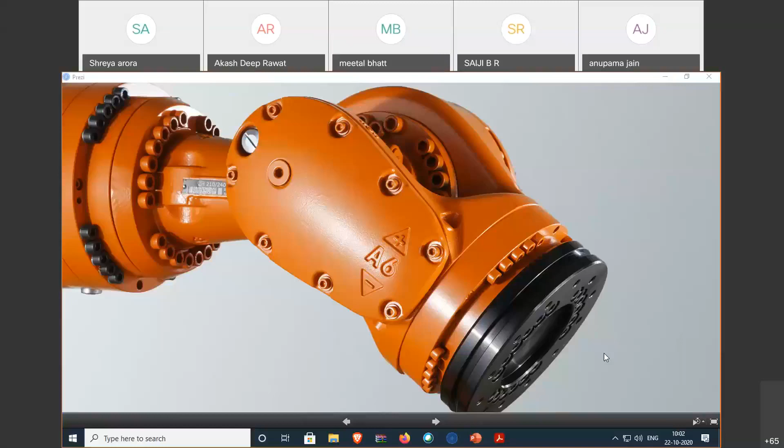He has worked on various industrial projects and research work, and has been an actively participating member of NBA, NAC, UGC, and AICTE visits.

His main highlights include working with DRDO, the Center for Artificial Intelligence and Robotics, Defense Research and Development Organization, as an external expert member under the Ministry of Defense, Government of India project, the SIQ project.

He has 67 international peer-reviewed journal papers, including 24 SCI papers and 43 Scopus and SCIE papers. He also has 53 national peer-reviewed papers to his credit.

He has a total of 120 papers published in high impact journals, both international and national.

He has provided PhD guidance to 3 students at present, and has guided 31 MTech students, with this work still ongoing.

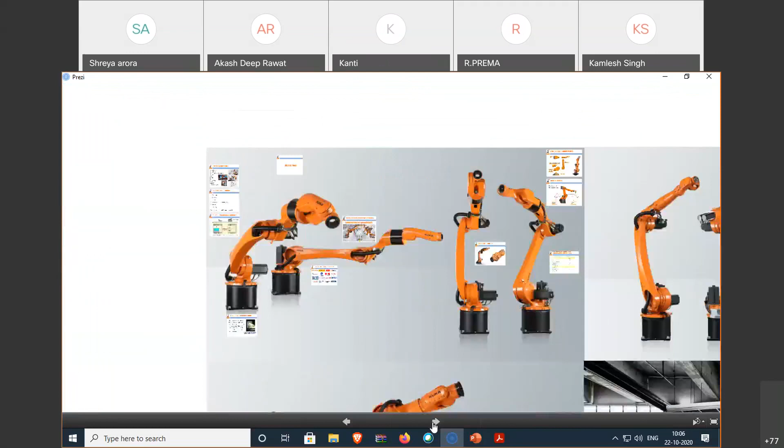So this is my core content - 50% is based on the presentation, and 50% is based on practical exposure in different simulators and tools.

So the first slide is on robotics - industrial robotics, as an introductory part. It is a multidisciplinary system engineering related field, relevant from class 6 to class 10 plus 2 standard and beyond.

We have realized that there is a wide gap between academics and the expectations of modern industry from passing out students. Ever-changing and ever-evolving technology is virtually transforming every aspect of human existence.

This change is constantly creating a need for skilled engineers, managers, and technocrats. India is rapidly adopting robotics in industrial production.

Robotics is a high-end technology stream witnessing rapid development and is being deployed extensively in industrial production, creating large employment potential for robotics-trained and certified engineers.

An industrial robot is a robot system used for manufacturing, especially for different assembly purposes and segments. The most commonly used robot configurations are the articulated robot and the SCARA robot.

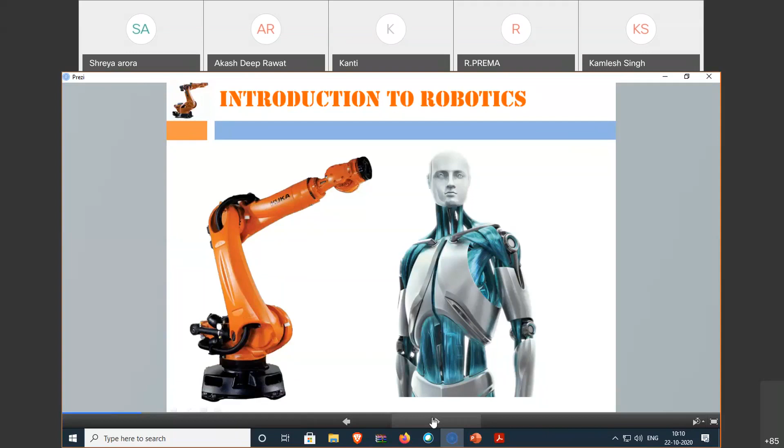Now the types of industrial robots. This is a simple example of industrial robots, categorized into different types. There are 5 different categories of industrial robots: Cartesian, cylindrical, spherical, SCARA, and the last and most advanced is the articulated robot. We'll discuss these in simulation mode.

This is a simple example, as I already discussed, of an industrial robot. So an industrial robot is an automatically controlled, reprogrammable and multi-purpose manipulator programmable in 3 or more axes, with a maximum of 7 or 8 axes. Industrial robots are much more flexible as to the orientation of the object on which they are operating, or even the task performed on the object itself.

As the robot may even need to identify objects, for example for more precise guidance, robots often contain a machine vision system acting as their visual sensors, linked to powerful computers or controllers. Artificial intelligence and machine learning is becoming an increasingly important factor in the modern industrial robot.

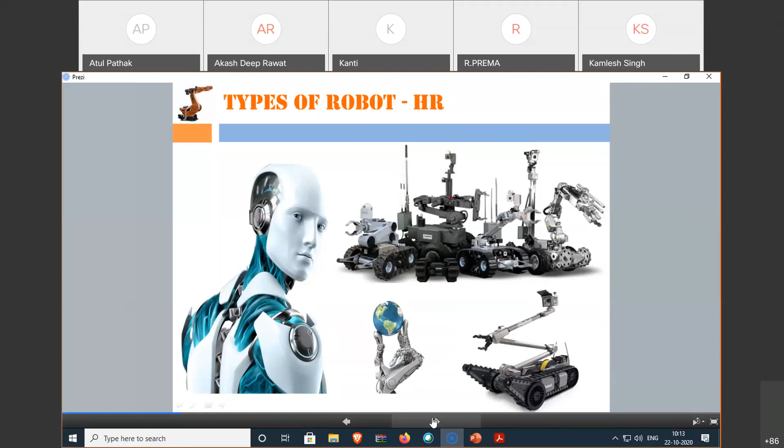The first industrial robot: Unimate was the first industrial robot, which worked on a General Motors assembly line at the Inland Fisher Guide plant in Ewing Township, New Jersey. It was invented by George Devol in 1954. In 1960, Devol personally sold the first Unimate robot, which was shipped in 1961 to General Motors.

Unimation was the world's first robotics company, founded in 1962 by Joseph F. Engelberger and George Devol. It was located in Danbury, USA. So this is our first industrial robot.

The first 6-axis industrial robot: PUMA was the first 6-axis industrial robot worldwide. PUMA stands for Programmable Universal Machine for Assembly, or alternatively Programmable Universal Manipulation Arm. Both names are correct. It was developed by Victor Scheinman at Unimation in 1978, initially developed for General Motors.

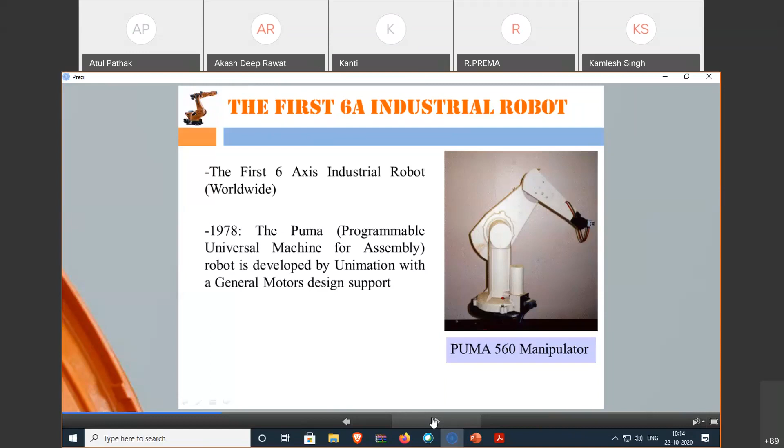This is a real industrial robot. Before I start this slide, I'll pose one question, since this session will be interactive. My question for everyone is: a robot is... what is the correct answer?

So we'll start and continue. If I'm talking about the real industrial robot, in this slide there are three most important parts of the real industrial robot. First is the robotic arm or robotic manipulator. Second is the industrial controller. And third is the KCP or HMI. We will discuss all these parts in detail in the next slide.

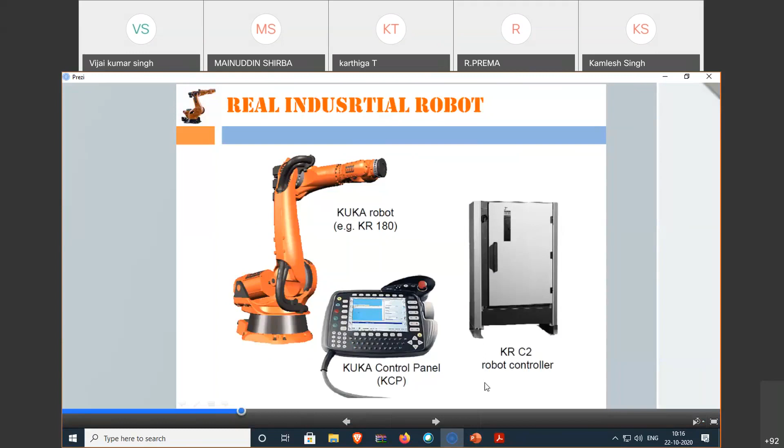Six-axis industrial robot, also called industrial robot, industrial manipulator, or industrial robotic arm. Different industrial robot manufacturers offer a comprehensive range of industrial robots, starting from 3 kg to 1300 kg payloads. Industrial robots come with powerful control technologies, so you can operate your robot and production system simply and efficiently. As per the figure, the first 3 axes are primary axis and the last 3 axes are the secondary axis.

Industrial robot parts: the arm can vary in size and shape. The industrial robot's arm is the part that positions the end effector. Industrial robot body structured parts are the base frame, rotating column, link arm, and wrist. And here you will see the counterbalancing system.

The counterbalancing system basically maintains the CG of the robot. Counterbalancing is a weight or force that balances or offsets another, when two objects of equal weight, power, or influence are acting opposing to each other. This device is controlled by an automatic process with the help of AI and ML, meaning artificial intelligence and machine learning.

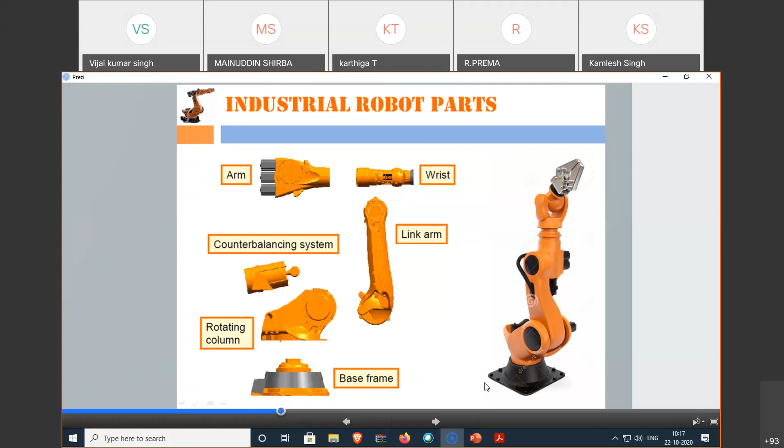This is the advanced robot controller, the industrial controller generation 4. This industrial robot controller is basically the brain of the industrial robotic arm and allows the parts of the robot to operate together. It works as a computer and allows the robot to also be connected to other systems.

The robotic arm controller runs as a set of instructions written in code, called a program. This program is input with the teach pendant, or HMI, or KCP. Many of today's industrial robotic arms use an interface resembling or built on the Windows operating system.

The industrial robot control system emphasizes being more powerful, more intelligent, safer, and more flexible than previous models. It is basically the 4th generation industrial controller, so it is very safe and very accurate. It emphasizes safety and functionality with the integration of the safety control system.

Additionally, there is a huge cost reduction for the integration, maintenance, and servicing of the industrial control, because this is very advanced. Communication modes available in the 4th generation control include power pack, servo, electronic measuring device, and communication control units. This is also supported with artificial intelligence and machine learning technology.

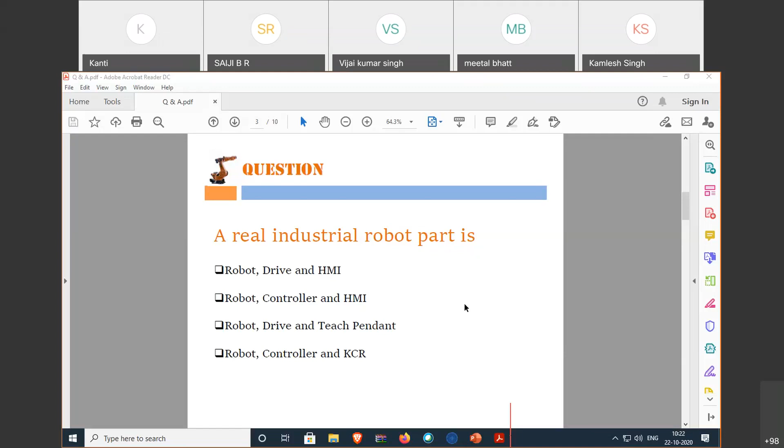So the option is C. Okay, so the correct answer is B. B is the correct answer because the 3 most important parts are the robot or industrial manipulator or industrial arm, second is the controller because the controller is the brain, and third is the HMI, human machine interface, or KCP or teach pendant. So answer B is correct. Drive is basically related to motion control, like a servo drive and so on. So the correct answer is B. Thank you.

HMI is very easy to use and user friendly because it is very advanced, basically a smart pad. This HMI is a 4th generation HMI, just like your touch phone. Maximum industrial robot manufacturers offer a fresh approach to robotic teach pendant technology. A number of hardware and software enhancements make the product unique. Robot operators will appreciate the smart pad's ergonomic, colorful, and highly interactive design.

Plus, the smart pad is not heavy, its weight is just 900 grams to 1100 grams. Commands are easily inputted using multifunctional keys, a 6D mouse, and the anti-reflection touch screen. Industrial robot manufacturers had designed the smart pad with more flexibility, allowing keys and a graphical interface to work to multiple content-driven modes.

A hot plug feature allows the smart pad to be detached from the running robot and system which is not in use. This capability increases overall safety and makes it possible to use the same pendant for multiple work cells. Other hardware features include an integrated USB 2.0 or 3.0 and 2 additional access switches to activate 2 additional 8 axis or 7 axis which can be controlled through keys. So this is a very advanced HMI that interacts between a human and machine, or human and robotic arm or controller.

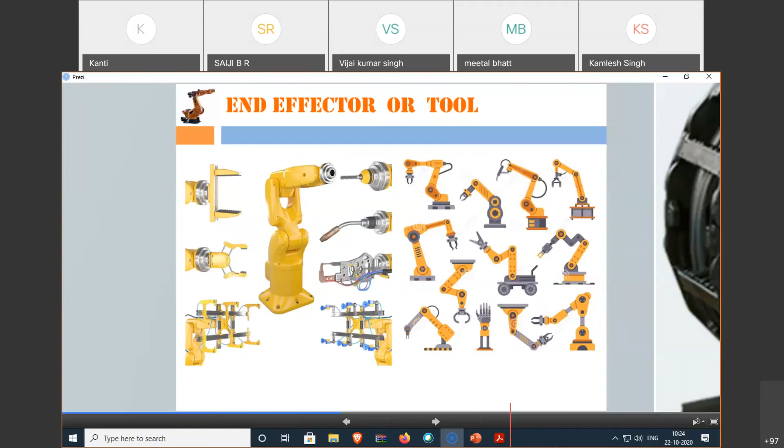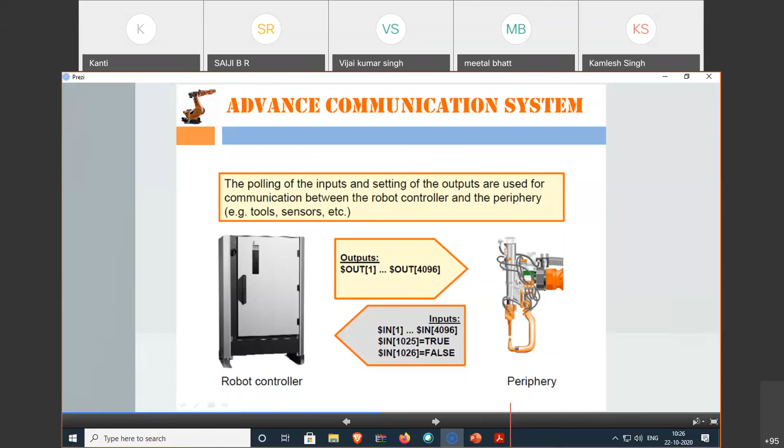Advanced communication system: as you know, it's a 4th generation industrial controller, and this system is more powerful and more intelligent. It is also controlled by artificial intelligence and machine learning. In the 4th generation controller, we can connect a maximum of 4096 inputs and 4096 outputs, meaning at a time we can connect and control a maximum of 4096 peripherals like tools, sensors, communicators, etc.

Advanced feedback and accuracy: the advanced C4 controller feedback integrates complete robot motion, sequence, process, and safety control. It seamlessly incorporates the complete safety controller into the control system. Its multi-core technology enables dual channel operations required for safety applications, such as welding channel operations and milling channel operations.

Feedback functions and feedback-oriented communication are implemented on the basis of Ethernet and VxWorks protocol. VxWorks is basically an RTOS, a real-time operating system, and it is very advanced for high-tech communication in real-time database management. Feedback system and accuracy protocol in VxWorks is very high, and safety and sensitivity are in current market demand. So this operating system will maybe be in high demand for the next decade.

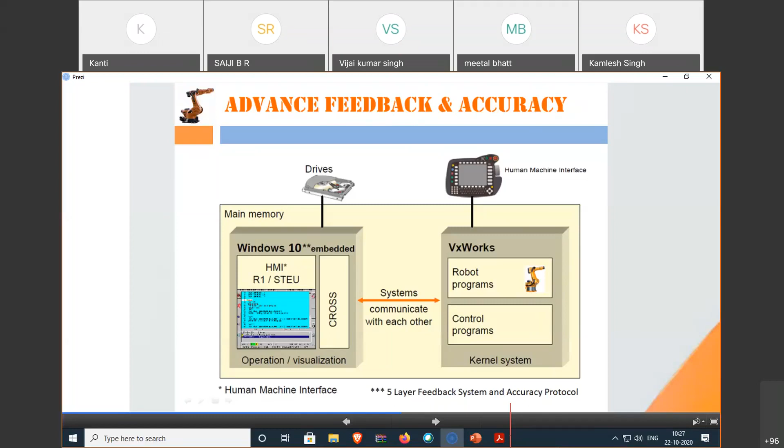Advanced feedback and accuracy: basically this feedback system has an inbuilt 5-layer feedback system and accuracy protocol. Here we use a 5-layer closed loop control system, and closed loop control systems are designed to automatically achieve and maintain the desired output condition by comparing it to the actual condition.

User group: this basically defines the cadre of the industrial robot programmer. The industrial robot user group contains all the basic, advanced, and expert functions such as path planning, input and output management, programming, controllability, and observability. The basic and starting group is the user group, which is designed for operators. An operator can set up and operate the industrial robot.

Next group is the expert group. This group is especially designed for the robot programmer. A robot programmer can provide the technical expertise required for the integration, programming, assistance, and service of the robotics application.

And the last is the administrator group. Most of us know what an administrator profile is, as well as a general user profile, when it comes to our PC.

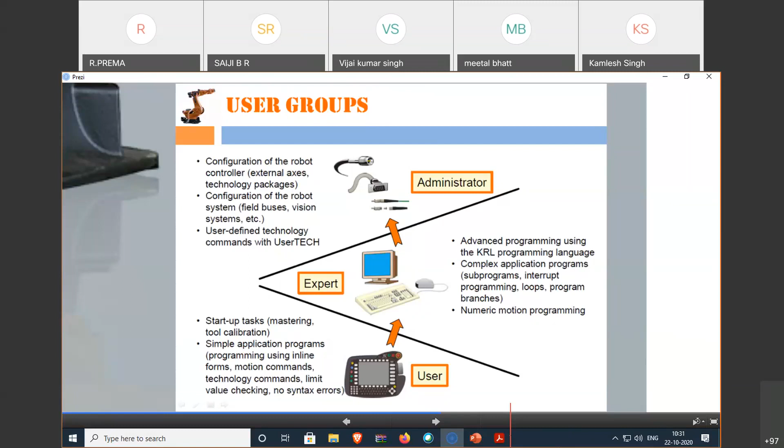Before I start this slide, here's a question: what is CCU? Any idea?

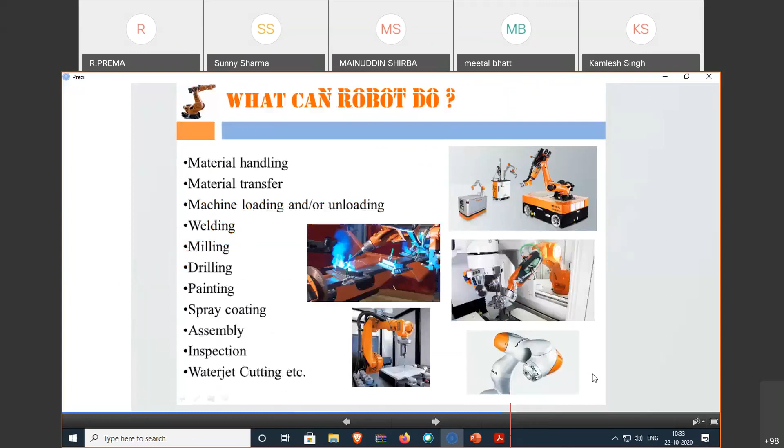What can a robot do? This classification is based on application. As more and more robots are designed for a specific task, this method of classification becomes more relevant. For example, many robots are designed for assembly work, which may not be readily adapted for other applications, and they become known as assembly robots.

One especially dedicated robot is designed and developed for SCARA - Selective Compliance Assembly Robotic Arm. This robot is especially dedicated for assembly purposes only.

This application here is a welding process. I will give the detail in simulation.

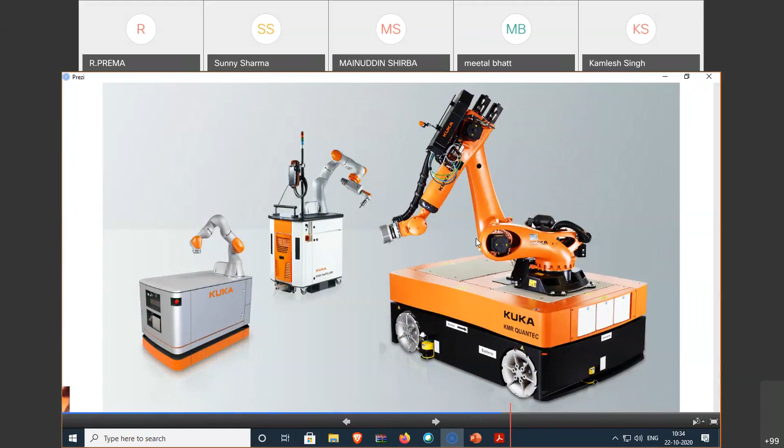Next, any idea what this is? A robot - an industrial robot? Yes, it's an industrial robot, but the whole system is one technical word. This platform - so it can be called a pick and place machine. It is pick and place. Yes, okay. Actually, this machine is AGV, automatic guided vehicle.

Automatic guided vehicle - I will show in video also. So this robot is basically an articulated robot, a 6-axis industrial manipulator. With the help of AGV, we can move in any direction - X, Y, and Z - for any type of application. Suppose we install a pick and place tool here, this robot becomes a pick and place robot. Suppose we install a welding tool, this robot becomes a welding robot. Depending on the tool, application, or requirement, the robot will operate different types of processes. This is basically a very advanced machine - an AGV, automatic guided vehicle, without any human support.

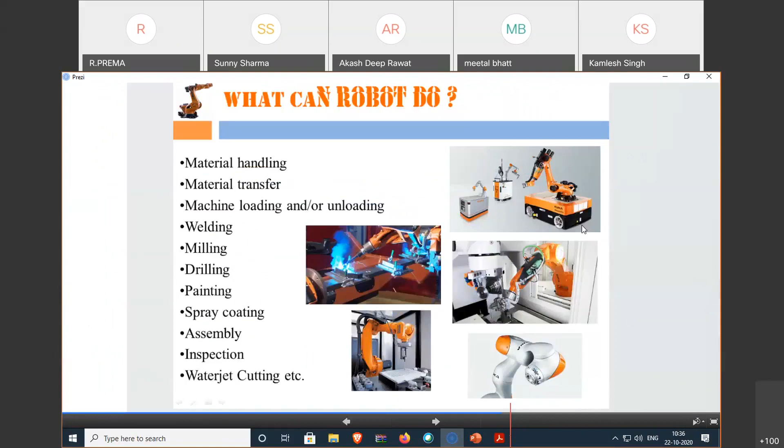And next, this simple drilling process. This is MAPS - Modular Automation Production System. This basically supports advanced automation work, in terms of CNC support, DMC support, AMC support. This type of support is basically the cadre of industrial robot called MAPS robot or MAPS automation.

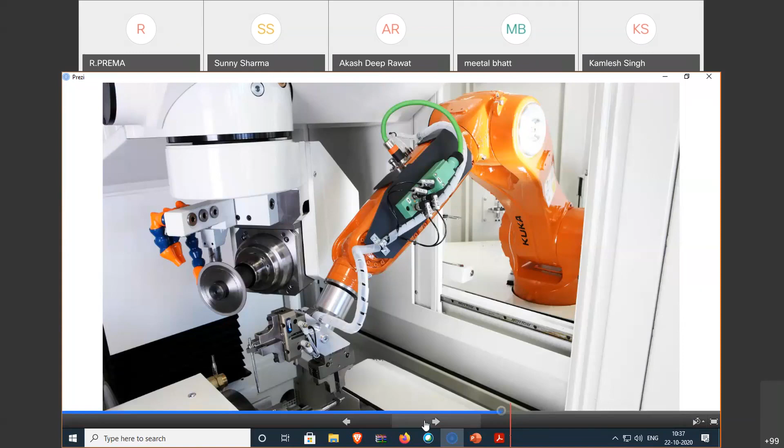And this is a medical operated robot, or medical research robot.

Next are the advantages of the industrial robot. These are very common advantages, and you are also well aware: high production requirement, reduced lead time, setup time elimination, better quality with lower price, safety in operations, shifting of manpower to the service sector, reduced rework processes, and competitive production.

And these are the disadvantages of the industrial robot. System changes are difficult and slow to implement. High cost and long-term payback, because the industrial robot cost is very high and automation cost is also very high.

And the next is unemployment - this is the most important part. If you're talking about unemployment, there are 4 different categories in the market: unskilled, semi-skilled, skilled, and highly skilled. I strongly mention here, if you are in an unskilled or semi-skilled cadre, immediately change your cadre to skilled technocrat, otherwise your smile may turn into a dangerous unemployment situation.

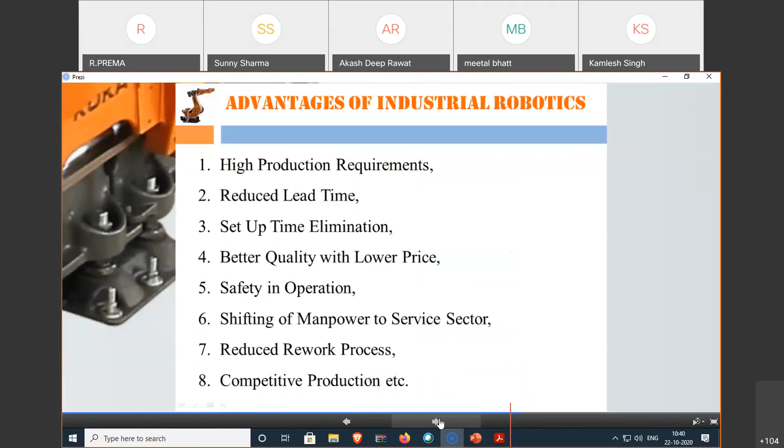So I think, is it clear? Is this slide clear? Yes, sir, clear.

I forget the full form, actually. SCARA productivity is 2.7% and other is 11.1%.

Next is the distribution of the world robot population, January 2020. In terms of ranking, Japan is number 1 at 44.1%, USA is 22.1%, and Germany is 8.8%.

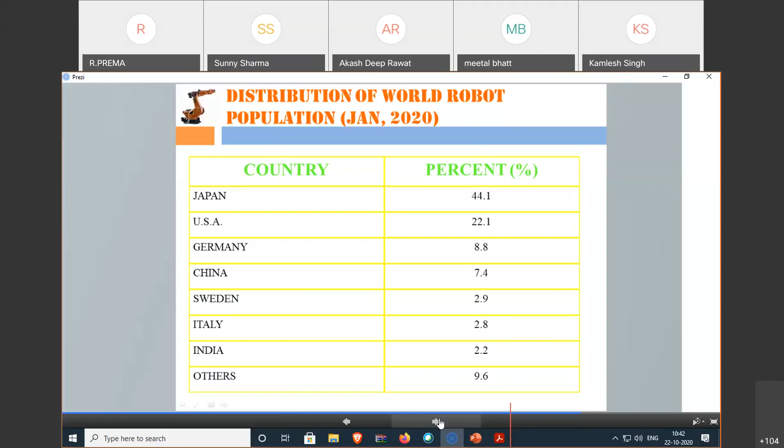India, if I'm talking about India, is 2.2%. So maybe some improvements are required for India, and others make up 9.6%.

So, business and job opportunities. As you know, industrial robot is a multidisciplinary system engineering related to different branches. So we need engineers, technocrats in different segments like electronics and communication, computer science, information technology, electronics and communications, and other special branches.

The revolution will create exciting career opportunities in different industries like manufacturing, petroleum, oil and gas, building material, construction, consumer durables, and many more, including telecommunication, computer hardware and software industries.

So pay structure of the robotic programmer, and this data is taken from authenticated sites. This pay structure data is basically taken from the official websites of Maruti Suzuki India, Hyundai Motors, Honda Car India, Volkswagen, General Motors, Tesla Motor USA, Volkswagen Motor USA, and BMW USA.

In India, basic robot programming pay is from 4 to 8 lakhs, advanced level 7 to 16, and expert is 19 to infinite. Infinite means it depends upon industry needs or requirements, your experience, knowledge, and multitasking ability - totally dependent on the situation. It's similar in the USA. So if I'm talking about a career in robotics, it's definitely bright.

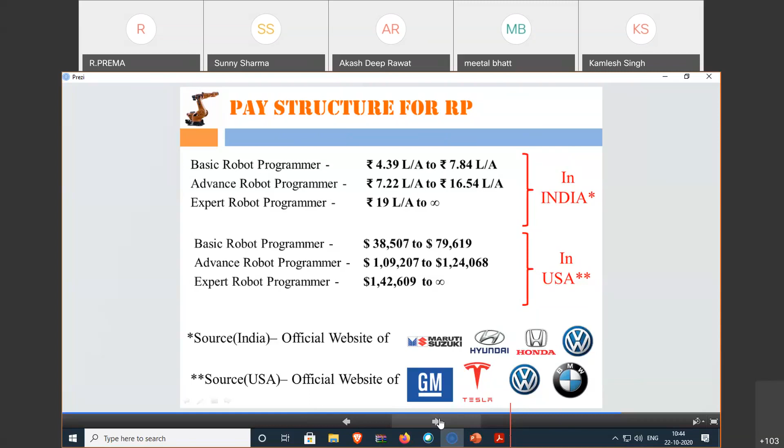The major robotic companies in India: KUKA, Fanuc - KUKA has basically been the number 1 company worldwide for the last 3 years. Then Fanuc, ABB, Mitsubishi Electric, Stäubli, Comau, Kawasaki, Denso, Yaskawa, Yamaha, Omron, Nachi, Epson, etc.

And these are the major automation companies in India, like Maruti Suzuki, Hyundai, Isuzu - these are the top major automation companies.

And the conclusion. I already talked in this presentation about the way of future computing, automation, digital robotics, business and academia, and daily life for everyone. Purpose of the talk is to make people appreciate how the process of automation and robotic computation has become an essential part of everything that we use and depend on 24/7 all over the world.

In terms of industrial automation robotics, Sir Stephen Hawking was at a Reddit session in October 2015. He advised that in the next decade overall robots will replace humans, and the future trend in industrial automation robotics is that overall robots will replace humans in the next decade, or maybe 10 to 15 years.

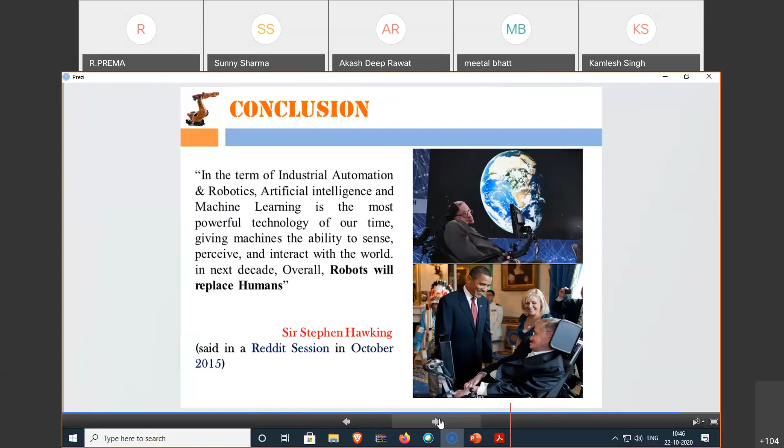So thank you. Now for the questions. Next question: maximum number of inputs and outputs is... 1026? 4096.

Option D. Right answer is Option D, sir. The maximum number of inputs and maximum number of outputs in terms of external or internal input generation for a robot controller.

The maximum number of inputs and outputs for the robot controller is 4096.

And the next and last question is: SCADA is Option A.

Supervisory control and data acquisition. Option D. I think option A. Are you sure? Option C. Control and data security. The correct answer is supervisory control and data acquisition. Option C is the correct answer.

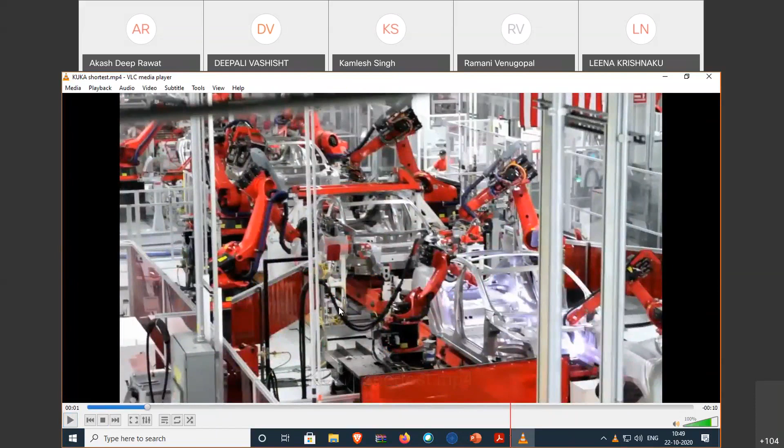The robot's maximum speed is 2 meters per second. This plant is completely automatic, and I think he used the robotic software version VxWorks 4.8.2.

Sir, please repeat the video, sir.

This is a Volkswagen car plant video. So please, see here.

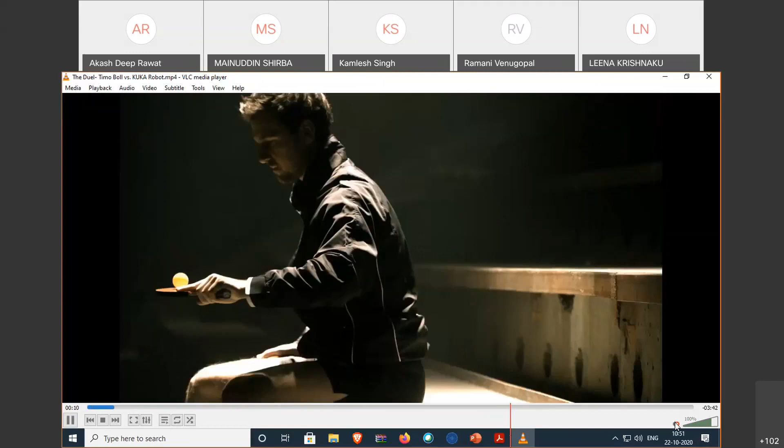This war is human versus machine.

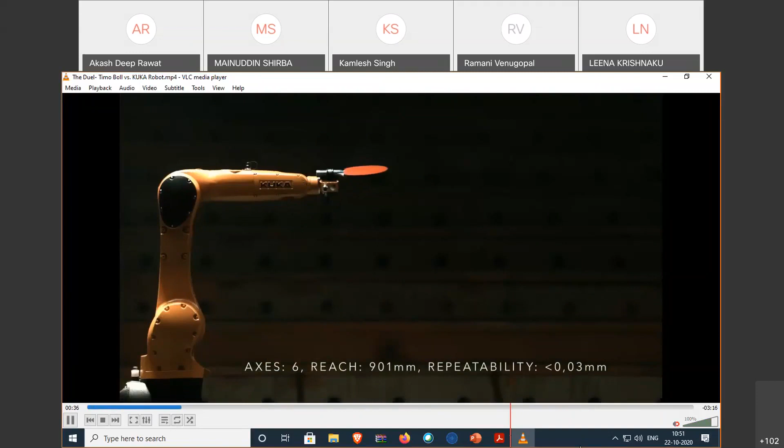This robot is a KUKA KR AGILUS, and this is a 6-axis industrial manipulator with the support of a real-time operating system. Its controller is a 4th generation controller, KRC4.

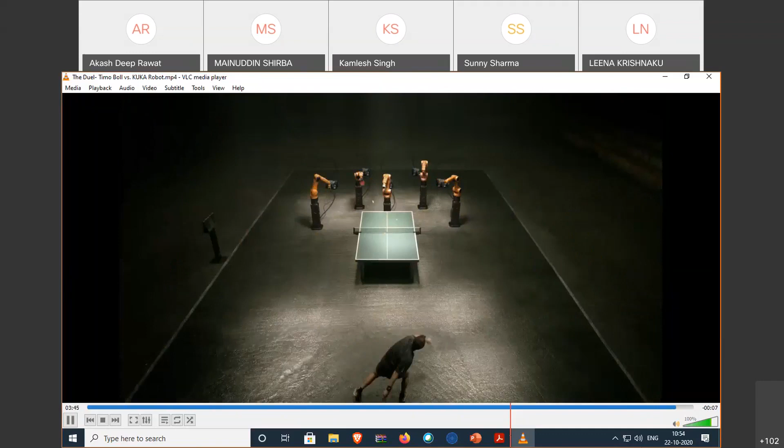This is a simple example of AI and machine learning.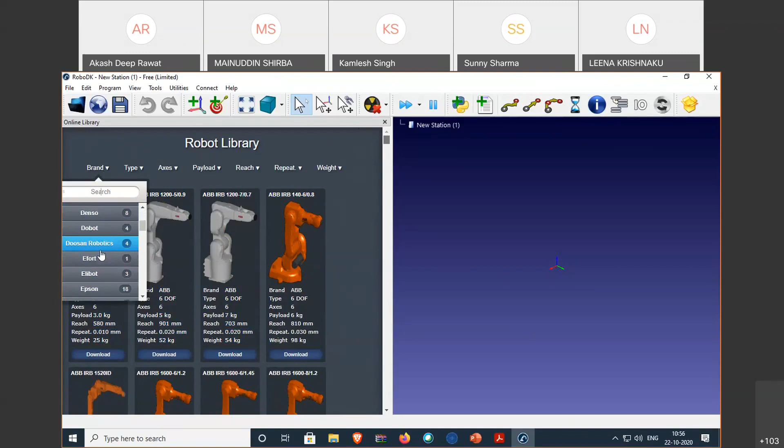So suppose we choose a KUKA. So this is the KUKA robot. Suppose we download a 6-axis or 16 kg payload robot.

This robot is an industrial carrier robot, and it is a 6-axis industrial robot. I already discussed there are 5 different categories: Cartesian robot, cylindrical, spherical, SCARA, and the most demanded and high accuracy based one, the articulated robot. So this robot is articulated based.

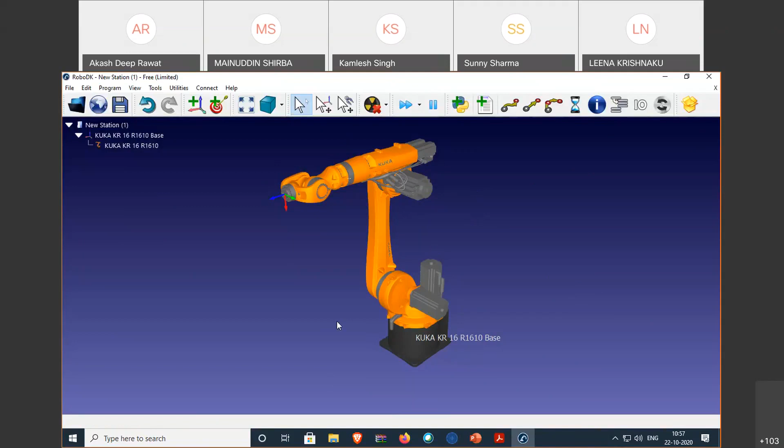So I will show the movement. When I click this robot, this window will open, and there are basically 2 different types of motion movement: one is translation movement and second is rotation movement. So what is the effect, what is the difference? I will show you here.

When I select translation in the X direction, no movement is visible here. But with rotation, movement is visible.

So translation movement is basically movement from one destination to another in an axis-specific movement. Suppose we have a 5-axis or 6-axis industrial manipulator, and we move in translation movement according to the X, Y, or Z axis. If we choose translation motion, we move different types of axis, or axis-specific movement.

Suppose we choose the Z axis in rotational form. So this is the motion of the A6 axis.

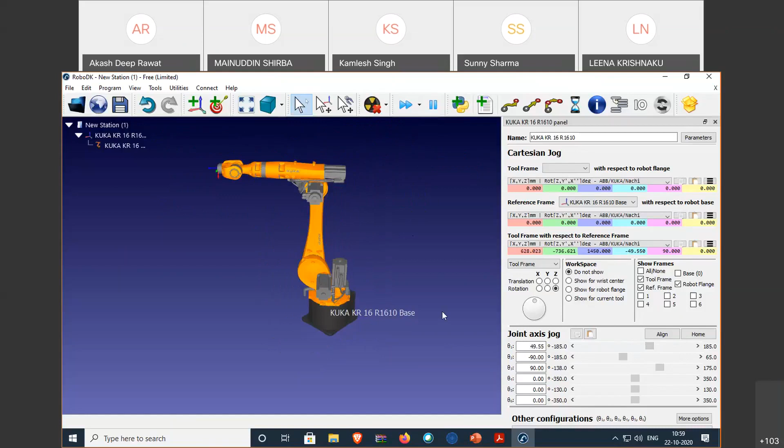So this is axis A1. This means if I move the axis-specific movement, then only the dedicated axis moves. So this is axis 1, and this is its movement, from minus 185 degrees to plus 185 degrees. Got it?

Second, A2. A2 is minus 185 to plus 65 degrees. So the second axis is here, this portion. The first axis is here, the second axis is here, from minus 185 to plus 65.

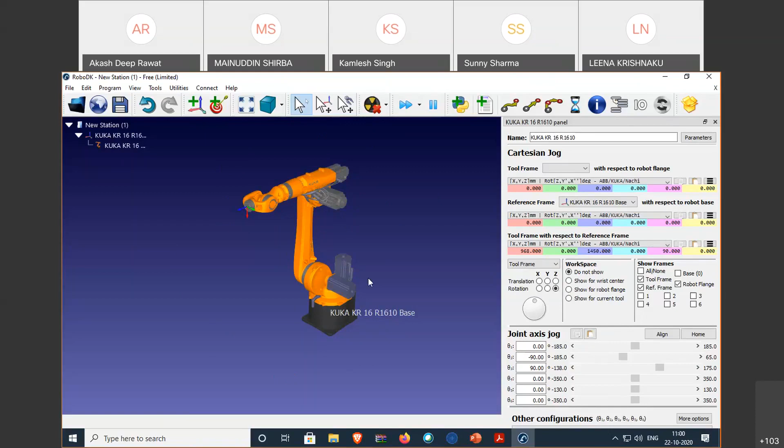The third axis is here. This is the third axis because the first three axes are the primary axis: first, second and third. These first three axes are the main axis, and the last three axes are the secondary axis. This third axis ranges from minus 138 to plus 175 degrees.

The fourth axis, let me show you. Is it visible?

Hello, is it visible? Yes, sir. Yes, sir, it is.

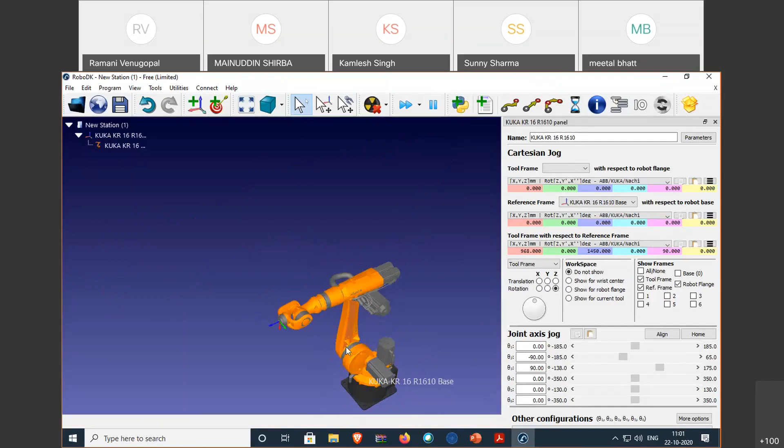Axis 4 is minus 350 degree to plus 350 degree, and axis 4 is this orbit. This black O-ring is called, in technical terms in robotics, orbit. This is A4 orbit. This is A1 orbit, A2 orbit, A3 orbit, A4 orbit, A5 orbit, and this is A6 orbit.

Okay, so I'll move the fourth axis. So this is the fourth axis, and this range is from minus 350 degree to plus 350 degree.

So sir, can you please define the orbit? Orbit is basically the axis movement. Here is specified the servo drive, here a servo drive is mounted.

The servo drive is connected with one communication control channel, and this communication control channel is coordinated with one O-ring cycle implementer. Actually, the hardware name is cycle instrumenter, and this is called the orbit. And this axis is basically placed on this orbit, this black color O-ring. Got it?

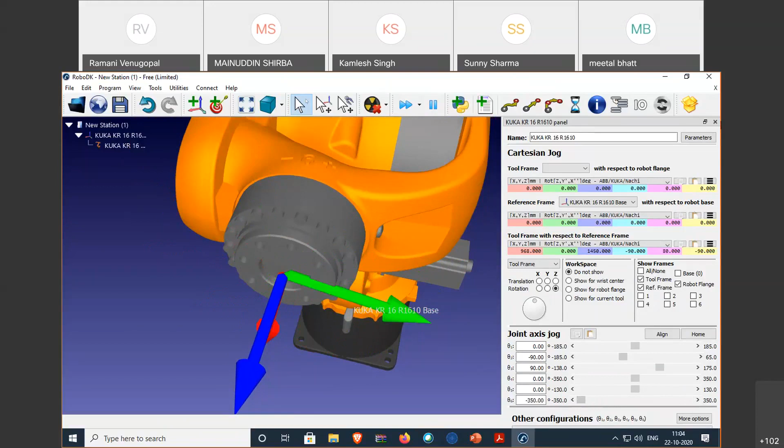So I installed one tool. Already installed different types of tools. Suppose I installed one welding gun, open, and this is basically installed on A6 axis. So this portion is the end effector of the robot.

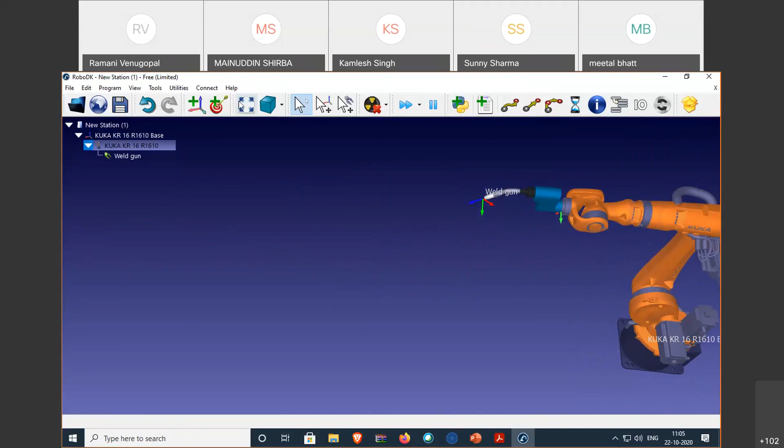So from A1 to A6 are different types of axis. A1 axis, A2 axis, A3, A4, A5, and A6 is the end effector of the robot.

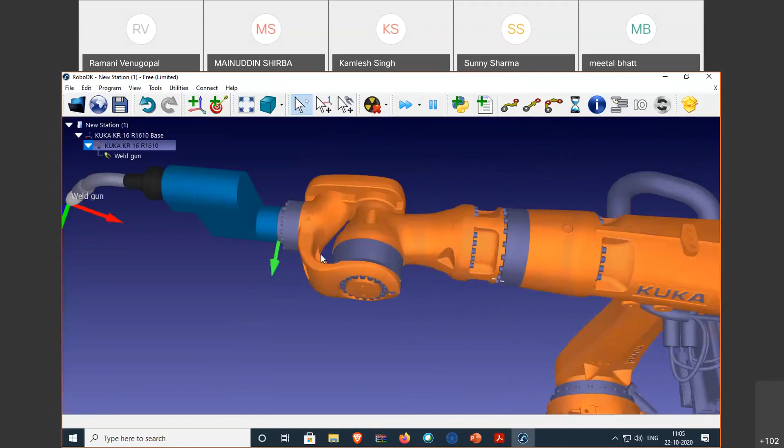So when I add any tool or any machine process operation instruments, or any type of third party hardware, it will be integrated with this A6 axis. And this is basically integrated with hardware, also software.

So this is basically a welding gun, and this welding gun is implemented with the robotic system channel. So if I move this axis, this is basically robotic welding, an industrial robotic welding manipulator. So when I click on robot and move axis A1, it moves with the tool.

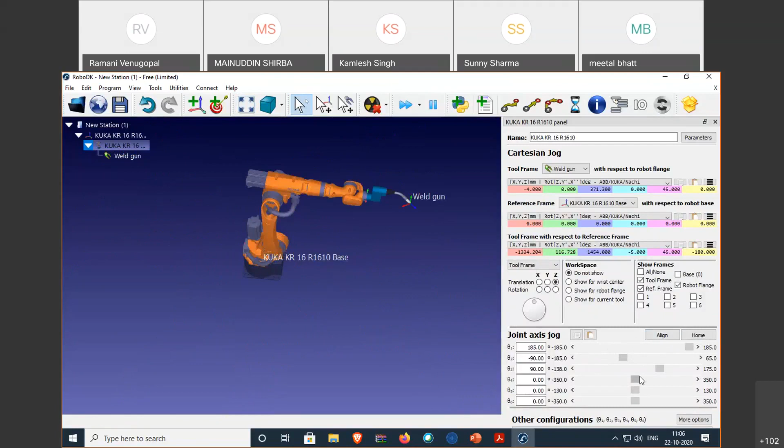Clear? Then I will show you one small process. Suppose we use any robotic painting. Yes? Yes ma'am? Any question?

So this is basically a robot, and this tool is basically a paint gun. Then this robot is called a paint gun robot. And this is the object.

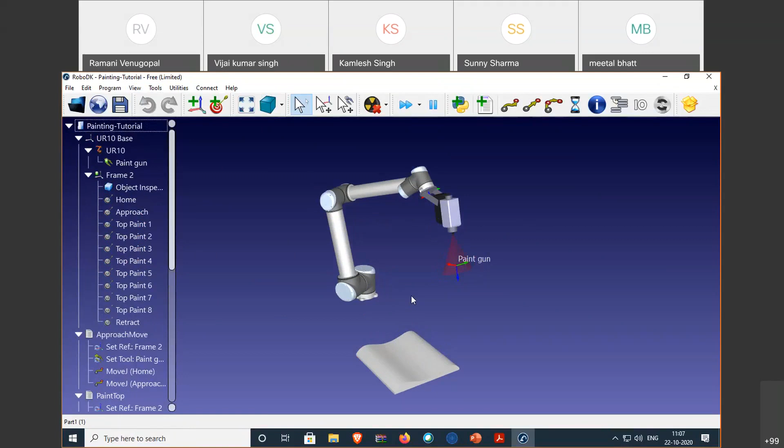Can we download this? Yes sir, can we download this program? Yes sir, you can download the program. You can download a robot, you can download a tool via this online library.

Suppose you can integrate any industrial robot with the industrial controller and support different types of applications, welding gun, milling, drilling, circle finishing, any type of tool. So you can download online, sir.

So this online download portal is here. If you click here, this is basically the online robot library. So this thing here, this robot, actually sir, RoboDK software is also downloadable.

Yes sir, it is free for 30 days only. You can purchase it for education purposes also, but this is especially free only for 30 days.

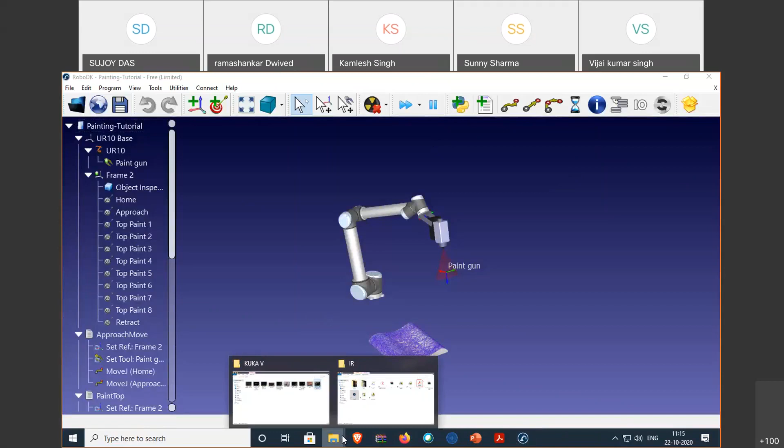Okay, and after that I will show you. I have created one small program. Just 1 minute, I will show you the basic code for the...

So any idea about C, C++ or Python? Yes, sir, yes, sir. We know C, C++ and Python.

So this programming is basically related to C++, but C and C++ is basically graphical based integration, along with C++, Python, and one database. You can use Oracle or SQL database with the help of VxWorks integration.

So this is a simple parameter, simple programming, and that programming methodology is RTOS. So this program is a critical systematic implementation, specially designed for artificial intelligence and machine learning based critical systematic implementation, and advanced brain routing and control for industrial robot controller KR C4. And this is a very basic program.

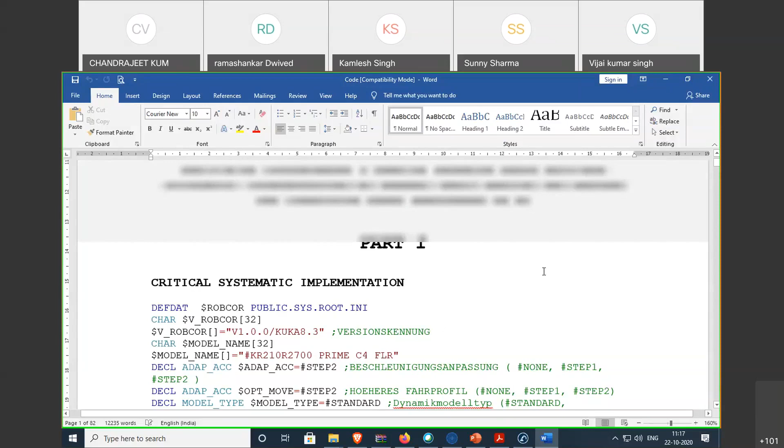So you're just aware of basic graphical coding related to C, C++, Python, and Java crypto languages. Okay, so just 1 minute. So this is a program.

Okay, please confirm me what is the output of this line.

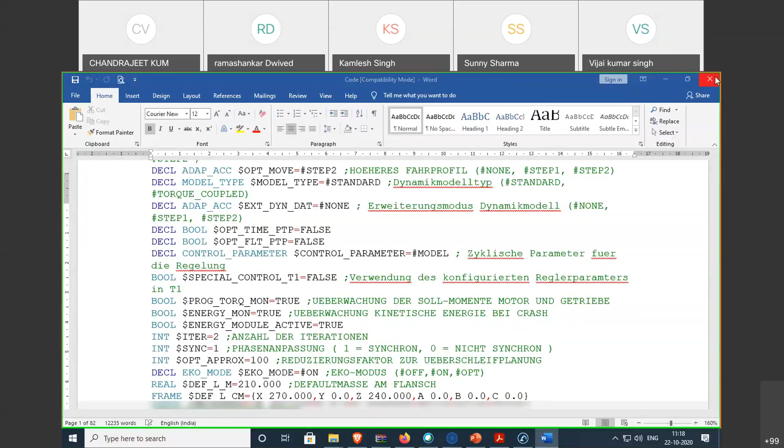Just 1 minute. Wait.

I will convert it into PDF form because there is some problem in my Microsoft Word.

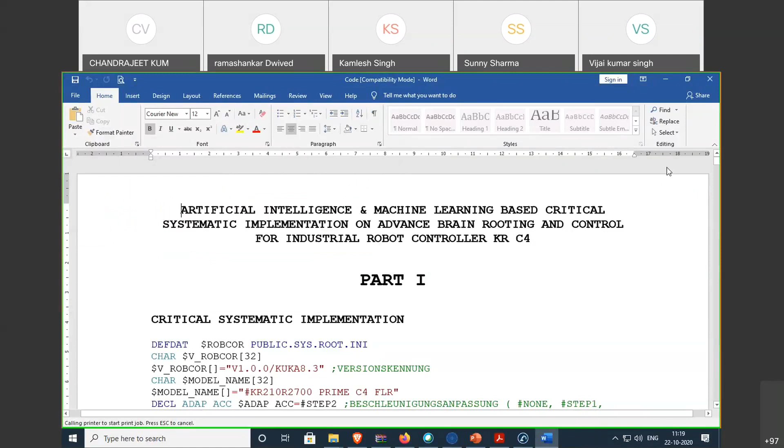Hello sir, I will open the PDF format.

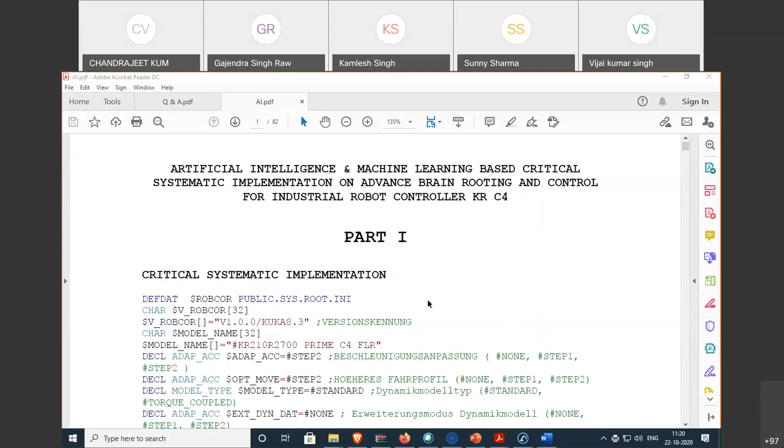So this is a code. Is it visible? Yes sir, so this is the basic implementation code based on the critical systematic implementation, and this program is with the help of C, C++, Python, I think 20 to 30% code in Java and SQL database. Okay, so just tell me what is the output of this line.

This line, call it this, from DEFDAT to this frame. What is the output?

You can take a screenshot and we will discuss after 10 to 15 minutes. I will move the presentation and simulation side. Okay, just please take this snapshot, I will discuss later.

So this is basically welding operations, and I can take one different example.

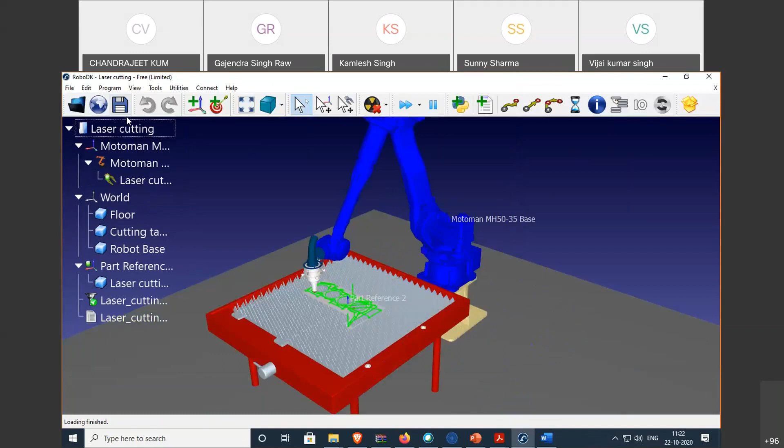So suppose we can take a laser cutting. So this is basically laser cutting operations. This is a laser cutting machine, and this is also integrated with the KRC4 controller with the support of Python.

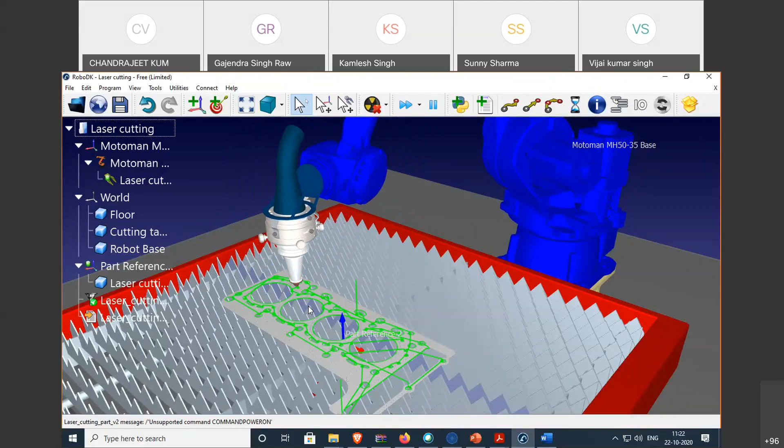So we integrate here this circle or any of the circle, similarly here, similarly here, similarly here. Okay, and this is basically integrated with AI and machine learning.

So before the programming, we integrate VxWorks, we integrate Python, we integrate one additional, SQL database, because database is the most important part of programming.

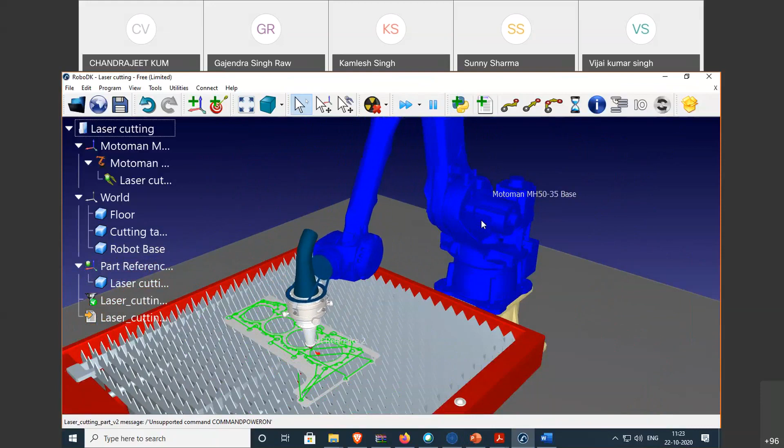So you can download SQL from the Microsoft side, or you can download Oracle from the Oracle side, and you can integrate directly with this Python. First integrate Python, then you can integrate with RoboDK.

Okay, this is the entire integration with the one root implemented. This is basically a basic input and output generation control system. So this operation is laser cutting. I will stop this operation and give you one different demo.

Next, I will show you a different operation. So this simulator name is RoboLogix. This is also free for some days. So I will show the arc welding.

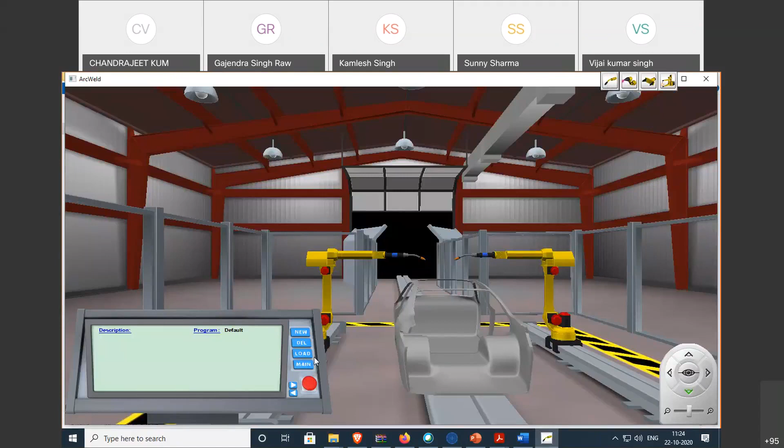So this is an arc welding operation here. This is a panel, this is basically HMI, this is a robot, and this is a controller. This is HMI, meaning human machine interface.

And we can program and create with the help of Python or any SQL database programming, or you can also program with the oriented software. I have loaded some examples, different types of programming. Suppose we can take one example, then we can load here.

Okay, and then we can run. So this is basically automatic operation.

So this is a BIW, body in white, and this is a car, any automotive car raw body.

This is arc welding. You can integrate with the motor also, this is basically servo motors. You can integrate different types of sensors, different types of actuators, different types of motion controller, and you can connect directly or indirectly with RoboDK, or connect with this arc welding software, with the help of any RTOS operation system.

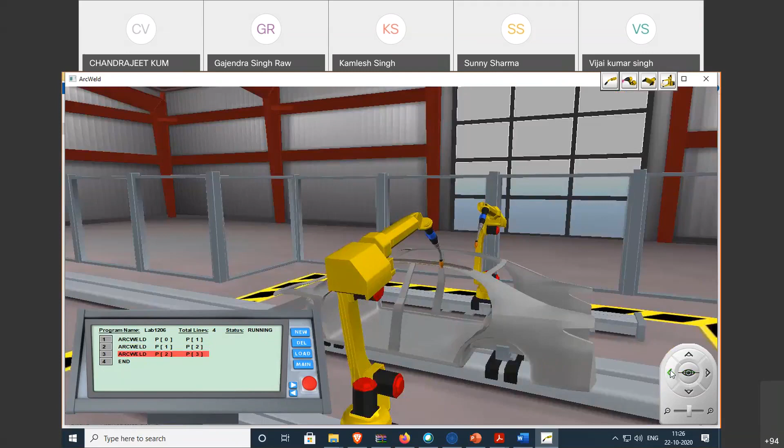Got it? Then painting. I will show you the painting operation.

So I can load any program. So this is a painting gun.

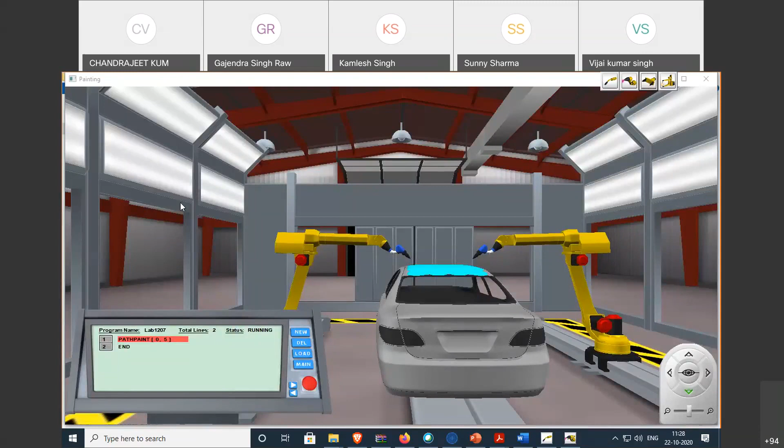Here we wait 20 seconds. Okay, so this is a pick and place operation.

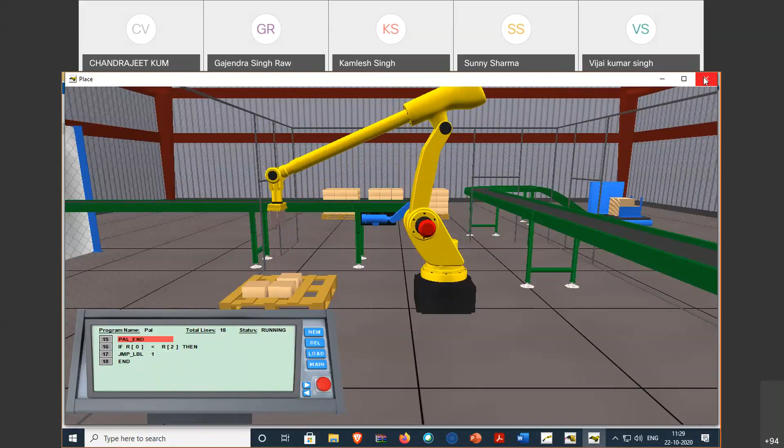And I will show you one interesting application, for both industrial and humanoid robotic operations. This is actually my favorite.

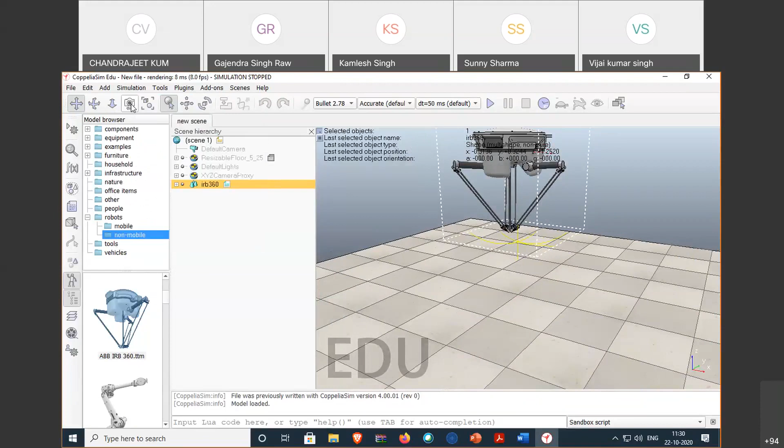So suppose we can choose non-mobile robots. These are different types of robots. Suppose we can choose this ABB robot, and suppose let's start the simulation.

Then this is basically the direction control mechanism, the X, Y, and Z direction control mechanism. You can create or manipulate different types of pick and place operations, any type of building operations, or any type of road system implementation operations.

And I will show you one mobile. So this is a humanoid robot. Suppose you can program a humanoid robot, you can also program with the motion control mechanism.

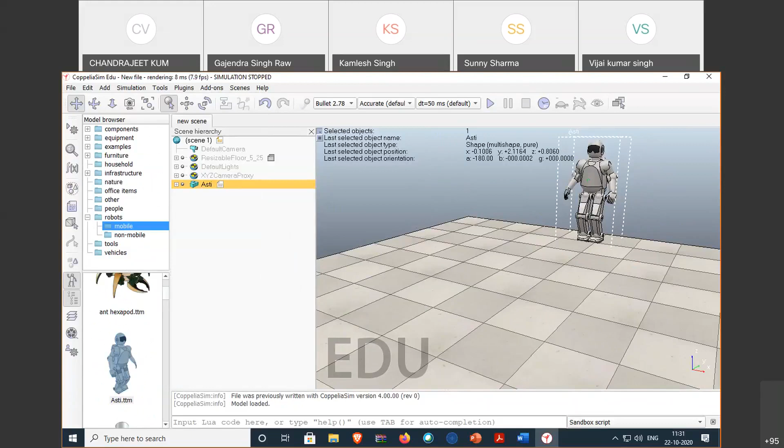So you can control here actually, so step size, if you increase step size, walking speed, this is a low walking speed and this is a high walking speed. Okay, so this is a drawback.

Excuse me, sir. Sir, can we generate C code, with this simulation, like Python or C code?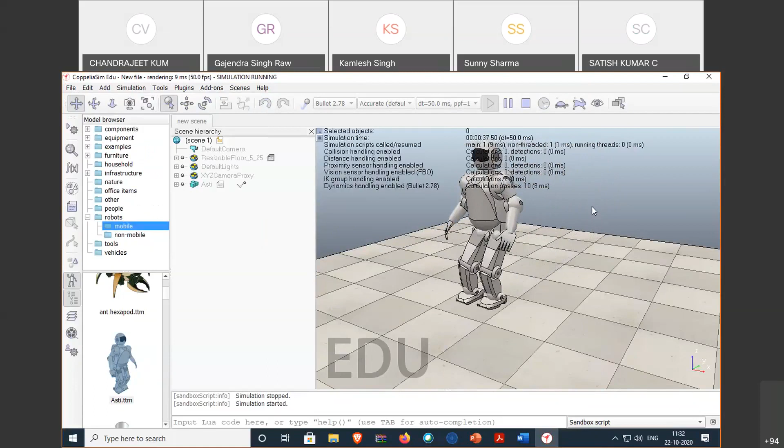Can't we generate in this tool only, sir? We have to inbuilt one more tool, sir. No, you can generate. Basically this is a robotic simulated software, so you can integrate any type of programming language. But the most capable and most demandable or preferable software is Python, with the support of a database. So you can convert, program, and integrate different types of software like C, C++, or generate any type of software, sir. You can integrate any type of software, but the important thing is compatibility.

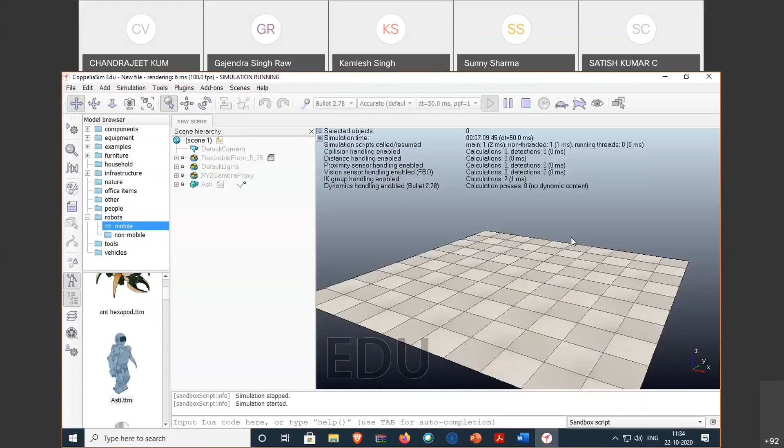You can try it, sir. So this is also based on programming language, and you can try it, and contact me if you have any problem or something. Then you can contact me, sir.

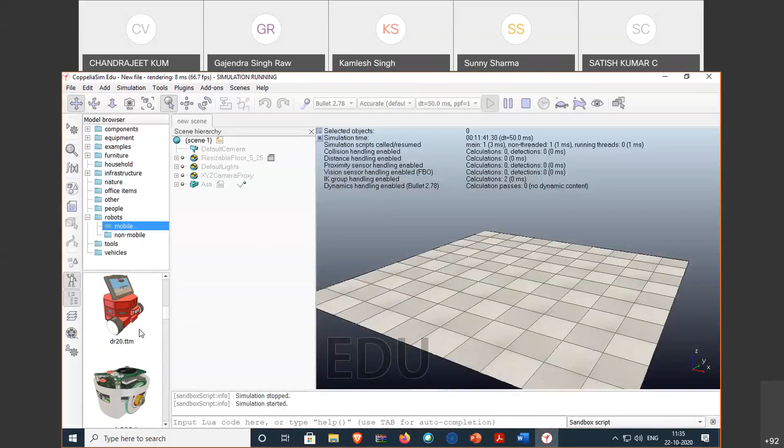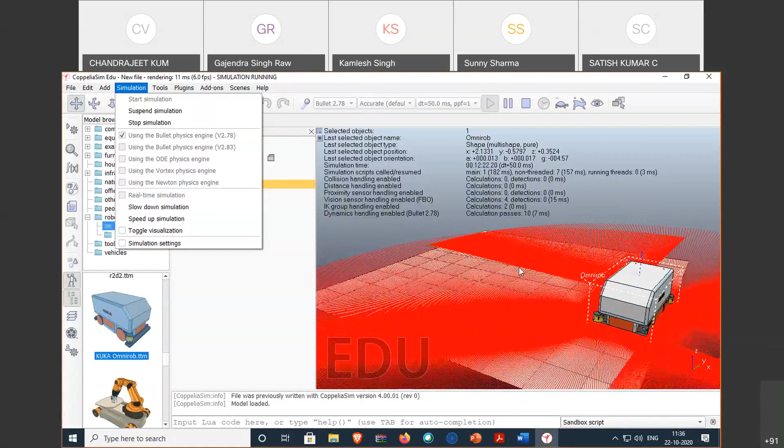So this is a different type of robot, this is AGV. We'll show you in the slide, we'll ask the question - this is the AGV. Basically it has obstacle sensors inbuilt in 4 directions, and this controls and observes different types of operations. So this is just like a transportation system mechanism - we can place any object from one destination to another, and we can create path planning, motion integration, axis direction, and different types of control mechanisms in this AGV, automatic guided vehicle.

And this is also an AGV. So suppose we can move it forward - let's move in the forward direction. And this is a rotation control.

This is a 6-axis industrial manipulator. We can use it for any type of operation. Suppose this tool is basically for pick and place operation, so you can use it as pick and place. Otherwise, if you mount a welding tool here, you can use it as a welding robot. And this is a movable item, so you can move to different locations, and you can weld different locations without any human effort.

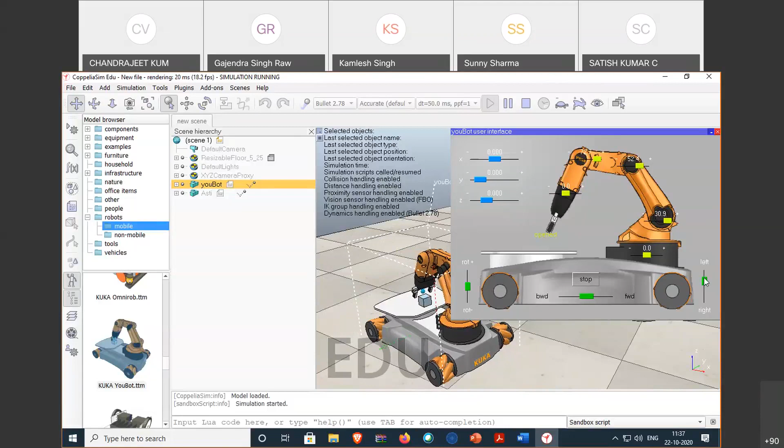So this is the left and right portion, and suppose you can move - I will show you. Suppose you move axis 2. This is axis 1 and this is axis 2. So suppose you move the axis, you can move it here. Suppose axis A1, so you can move axis A1 here. And with this, you can create any type of robotic system process, or any type of robotic programming with the support of AI or ML.